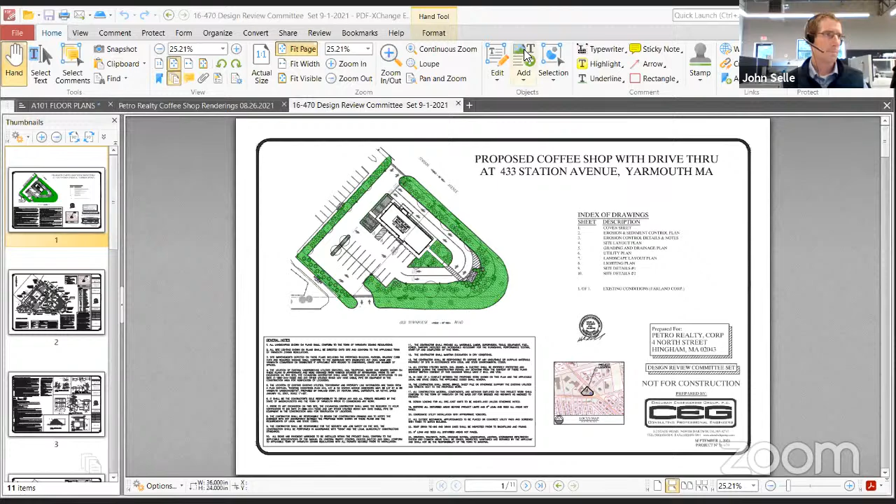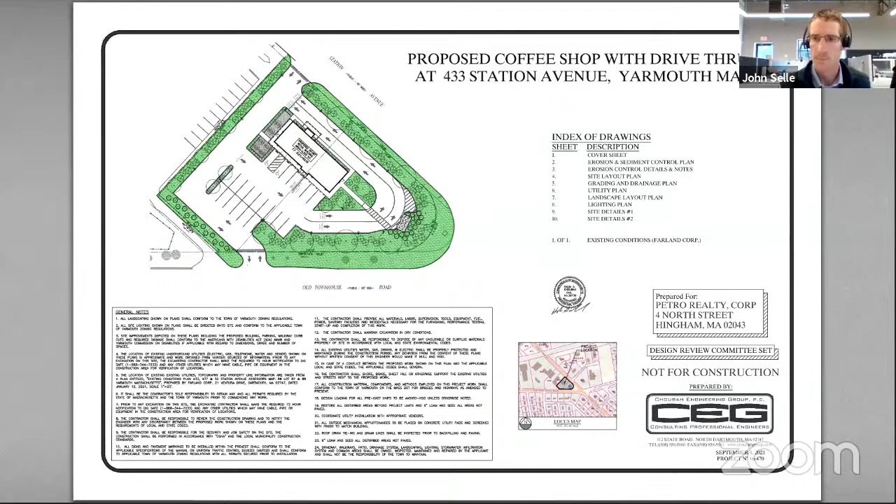John, did you want me to start with the sites quick? Yeah, why don't you give an overview of this site, Hal, and then we'll come back and dive into the building when we get a bit more detail. For the record, Halim Chouban, I'm a design consulting engineer with offices in Dartmouth, Massachusetts, here with Aaron and John. John is the architect, Aaron is the developer. Aaron owns the two lots at the corner of Old Town House Road and Station Avenue.

Currently the two lots are fully developed. There's a gas station on one of the lots, and another commercial building on the other lot. The two lots combine approximately 37,000 square feet. Access to the site is via four existing curb cuts, two on Station Avenue and two on Old Town House Road.

How can I? Yeah, I think one lot was 17. Combined there... combined 37. One lot is 17, one lot is 20, and combined at 37,000 square feet.

We propose to demolish the existing buildings on site, combine the two lots, revise the access to the site, eliminate two or three existing curb cuts, and improve the traffic circulation on site. We propose one building, approximately 2,400 square feet, to be used as a coffee shop with a drive-through.

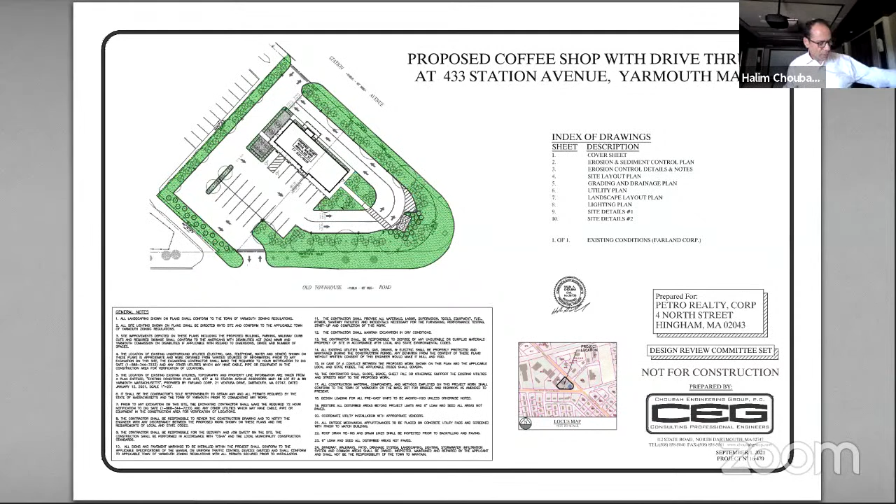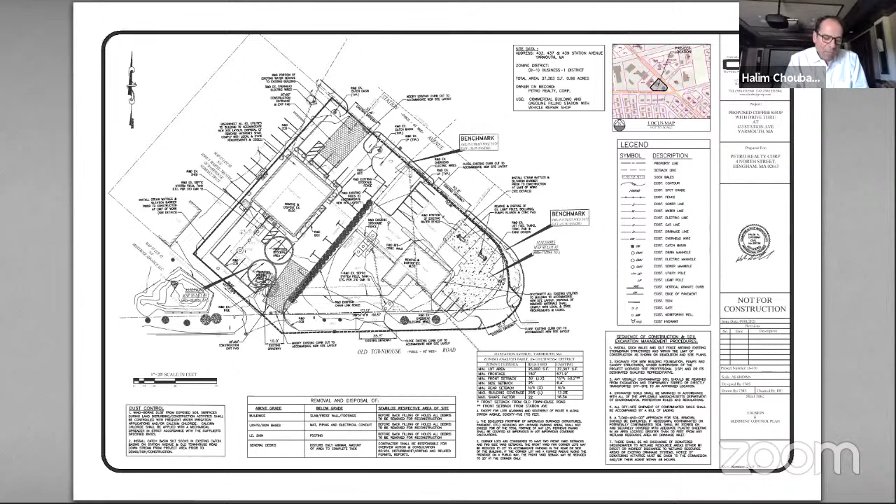We have a civil site layout, and also a preliminary grading and drainage plan. We would be collecting all the runoff from the site into an infiltration system on site, designed in compliance with Mass DEP and Town of Yarmouth stormwater management requirements. We would be providing a brand new septic system on site for the proposed coffee shop, in compliance with Title V of Mass DEP.

Landscape would be in compliance with the requirements of the zoning bylaws. I do have some other details for the site, and this is it for the site. At this time, we know we have to go through a site plan review. Once we go through your review first, we'll be going through this with the planning board.

I think we might have to check with Kathleen — we might have to file with zoning at this time. I'm not really sure what items require zoning relief, but if we do have to go through zoning, we'll be filing with zoning. Other than that, I think that's the site. If you have any questions, I'll be happy to answer them. And John, if you want to take the building portion of the presentation at this time.

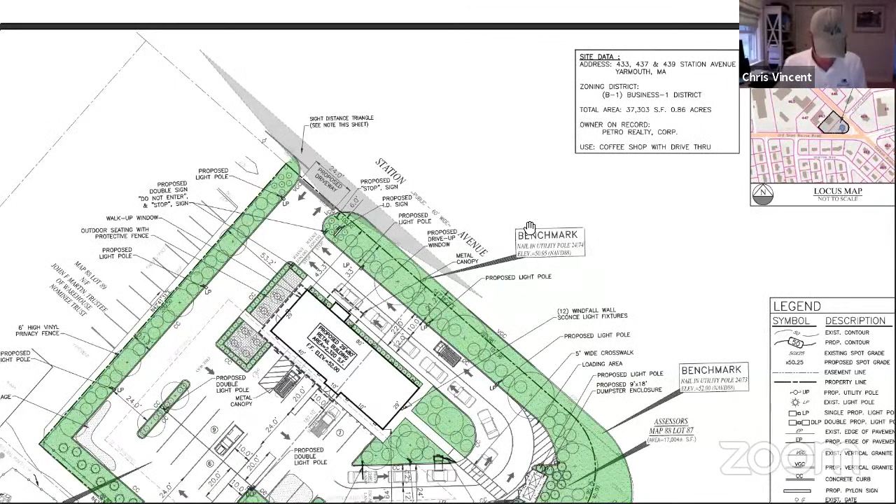The buffer that they're showing, the 21.2, includes the green space in the town right of way. So the buffer on their property is approximately 15 feet. So that is not what would be typically required, right?

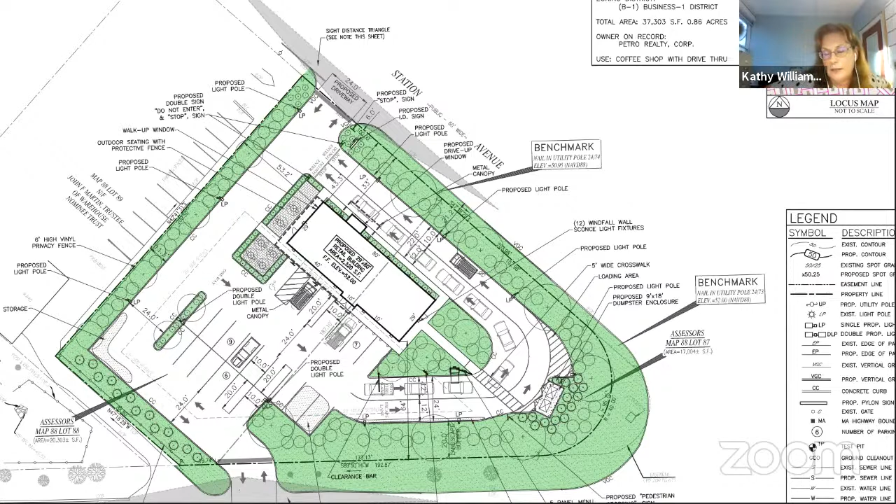This is a redevelopment project, right, so they need to meet section 301 to the maximum extent practicable. And that's something where you will need relief from zoning for that, typically done through a special permit. All that information will be identified during site plan review. This is just really looking at the architectural site and design standards.

So there's more to come. Okay, yeah, and that's fine. I think, Kathy had brought this up before, that the two so-called parking lot trees are in the area of the septic system, so that something there might need to be moved, I would gather. I also had a question about the southwest buffer, but apparently those are 3-inch caliper cedar trees along there, and I'm fine with it. So those were their only questions on the site.

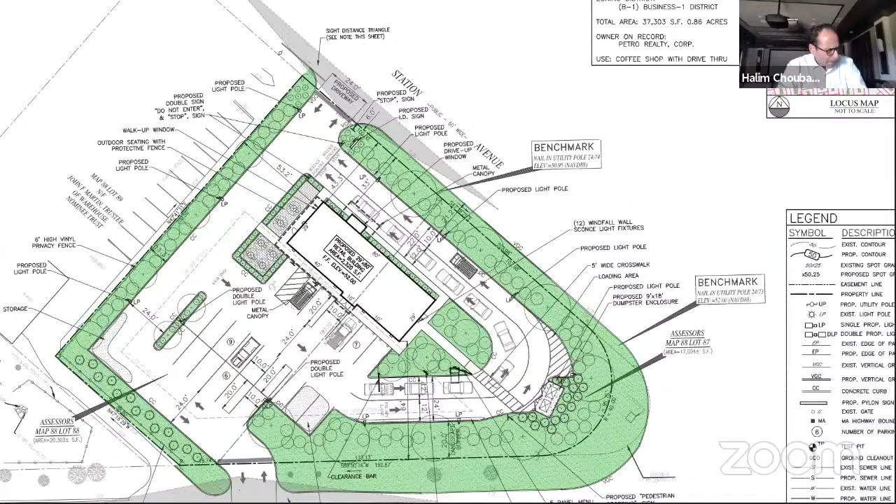Everybody will be looking forward to it, actually. Thank you. Go ahead with the building. Great. Well, actually, did anybody else have any questions on the site? I don't. Good. Okay, we'll have some overall questions that may include the site again, but go ahead with the building.

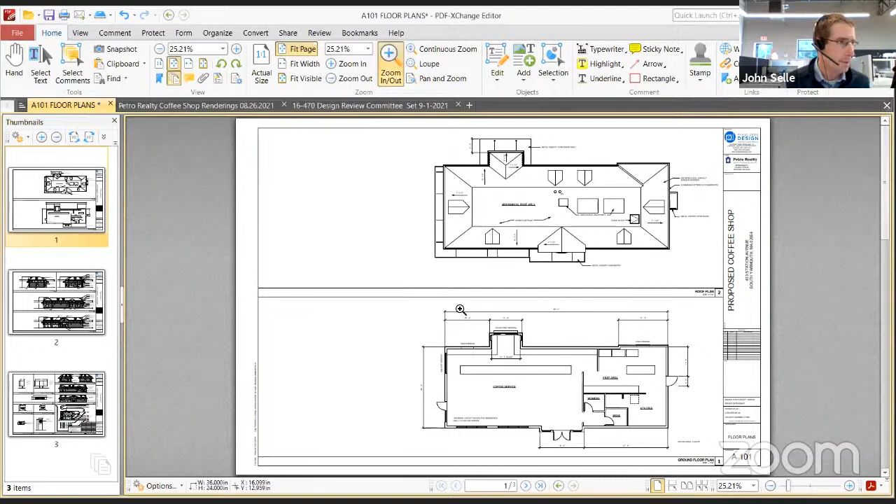Sure, no problem. So I'll bring up the floor plans to begin with here, just to give you a quick overview of the coffee shop layout. Again, as mentioned, it's around 2,400 square feet. Pretty simple layout on the floor plan.

Main entry plan south here into a sort of retail front of house with a counter providing the service for the coffee shop, and then a back of house area with a couple of single toilet rooms. Pretty straightforward, an exit out of the back of house side, drive-through window along the drive-through lane.

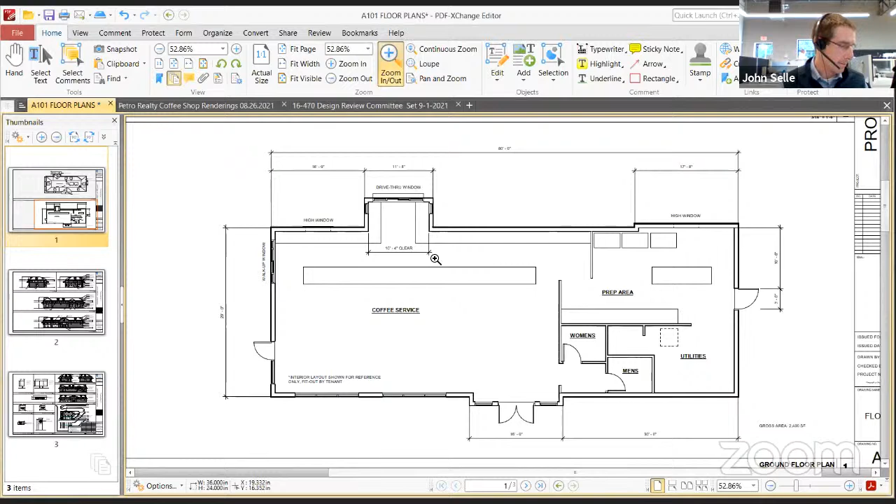The roof plan, notable feature is that we're using a hipped roof around the perimeter, but a flat roof portion within that hipped roof to allow us to have a mechanical roof well, if you will, to screen the mechanical equipment at a lower roof elevation so you wouldn't see it from outside the building.

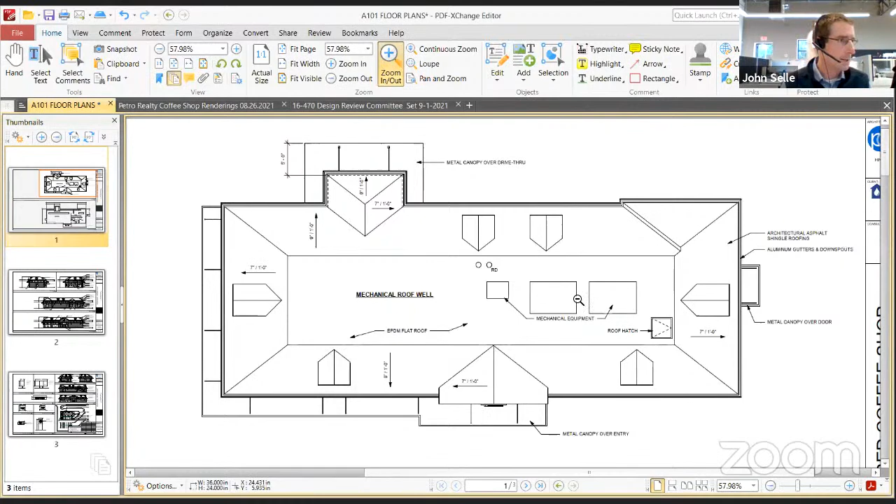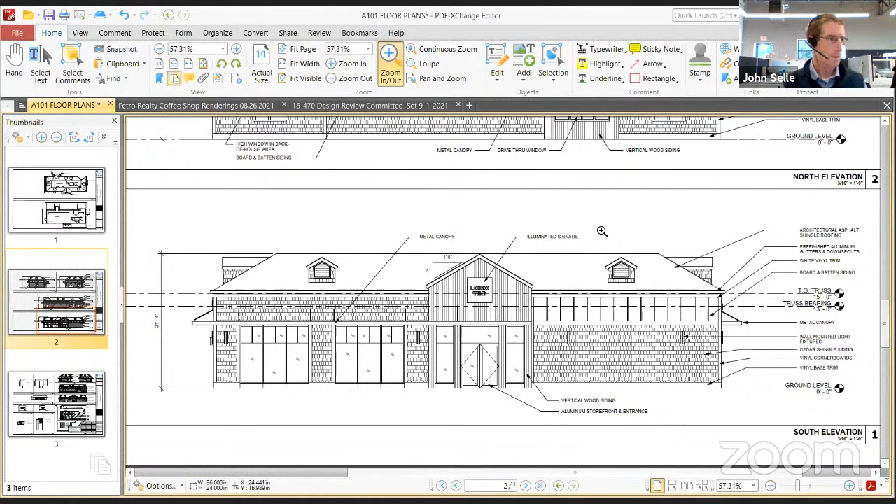A quick look at the elevations, and then we'll look at some 3D drawings that will give you a better sense of the building. It's a fairly small, fairly simple building, but we do use the materials recommended by the town design guidelines: high quality natural materials with cedar shingles as the primary material, accent materials like vertical charred wood at entry locations, white vinyl trim accents around the windows and fenestrations to break up the height of the walls in some cases, and black metal work on the canopies and other accents like the light fixtures. Just to give you a general sense of the overall materials.

Pitched roofs, we've tried to break up the mass of the building with the entry accents, changing the wall plane of the building, so that we don't have any really long runs of wall without some articulation to them.

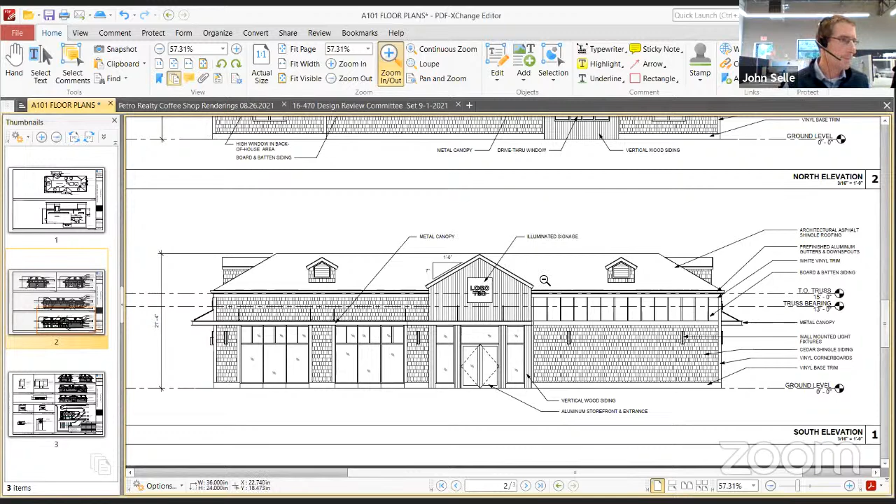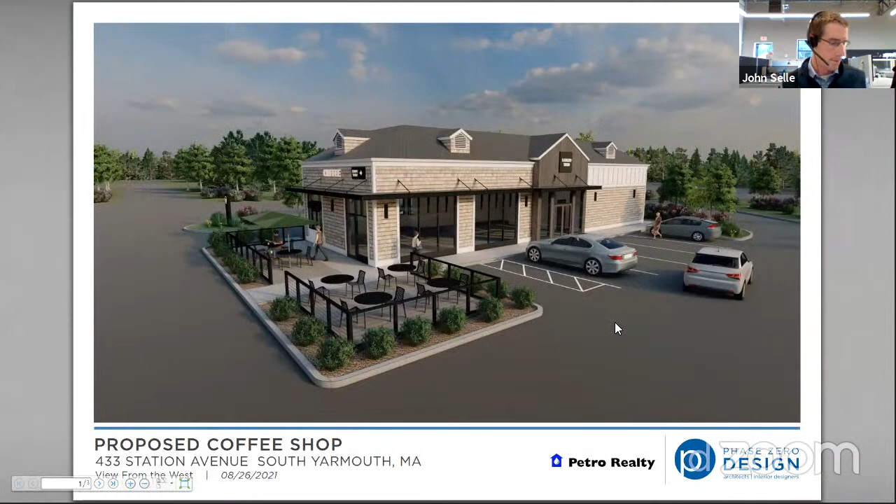I'll go ahead and jump right to the 3D renderings of the project to really give you a good look at what it'll look like. Again, primary materials are cedar shingles, vertical wood siding at the entries. The white trim is a vinyl trim. Black anodized storefronts, black accent metals on the canopies and exterior railings.

Small seating area outside of the coffee shop. Asphalt shingle roofing with some dormers on it to again break down the length of the building with some additional detail. That's another view, so this is now coming around the building into the entrance to the drive-through lane, looking back at the main entry of the building.

And then we have a view from the far side of the drive-through, looking back at the drive-through lane. Again, the vertical wood siding on the accent at the bump out at the drive-through space, the black canopies, to give you a sense of that.

I would like to talk you through signage. We will be seeking relief on signage. Kathy, is that something we need to get into detail on today's call to get a recommendation from this group, or will that be a follow-up conversation? I think design review typically talks about the aesthetics of the signage, not whether you're meeting zoning or what relief you might need. So if you wanted to show generally what you're including for signage, which seems to blend with the rest of the building.

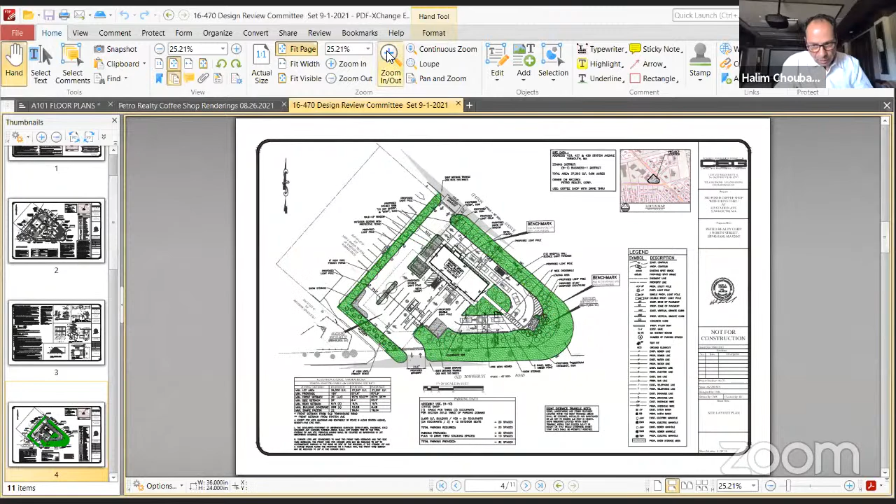It's gotta be at least 5 feet in front of the door, so we'll have to go through that. And I know that you're also proposing bollards there that aren't shown in the rendering.

Just be mindful of what you're choosing as your material. It looks like it's just PVC pipe. I'm sure the architect can come up with something a little less utilitarian that will keep the great look of the building you guys have going on there.

The only thing about the lighting is I think you have 22 feet shown for your lighting, but the maximum height allowed is 20 feet. So just keep that in mind in your photometrics.

I think you've done a great job adding the buffers around this property, which doesn't necessarily have a great amount of buffers now. But there are requirements in the zoning bylaw regarding hiding the parking with trees of 3-inch caliper every 20 feet. Just make sure you're meeting that, because when you go to the zoning board of appeals, they're going to want to show that you're asking for as little relief as you need.

I think you've done a great job getting as close as possible, especially for a redevelopment project, so I think they'll really appreciate that. But if there are a few tweaks you can make to fully meet the bylaw, I think they'll appreciate that too. I'll talk about these things in site plan review, but I just wanted to give you a heads up.

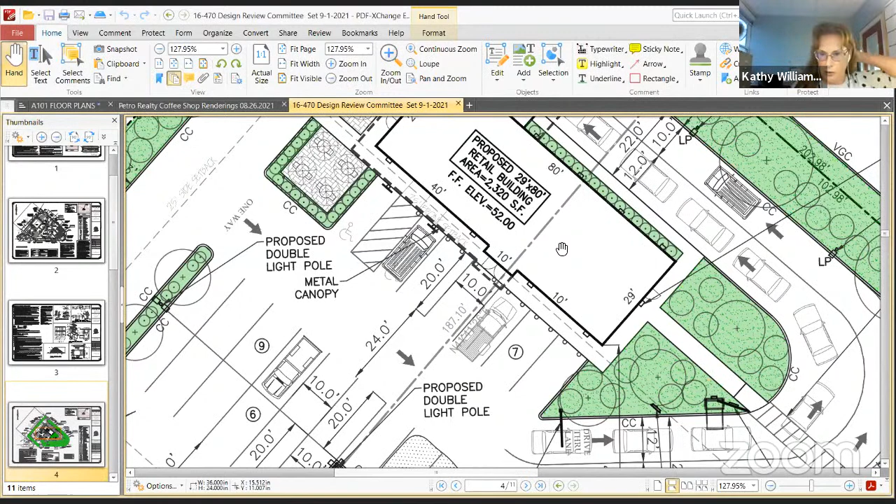I had a couple other things, maybe going back to the buffers and so forth. It's no big deal, but I noticed some discrepancies - if you count the number of shrubs shown, it doesn't always show the right number on the plan.

I'm not sure if the plan takes precedence over the code that states how many of whatever should be there. There were a few discrepancies on that. We'll check that. Also on the drive-through side, it shows, I think it was Boxwoods or whatever.

It shows them coming up to the drive-through window and beyond the drive-through window, but the pictures only show them beyond the drive-through window. So I take it the plan would probably take preference over the elevations or diagrams.

Yes, I would say so. For any of the plantings, the planting plan would certainly take precedence over the rendering.

Did you give information to Kathleen's in terms of the 2 in-lot trees in that island, which I know also has light posts? Maybe move them more toward the center of the parking area where it's not over the septic, or move the septic maybe.

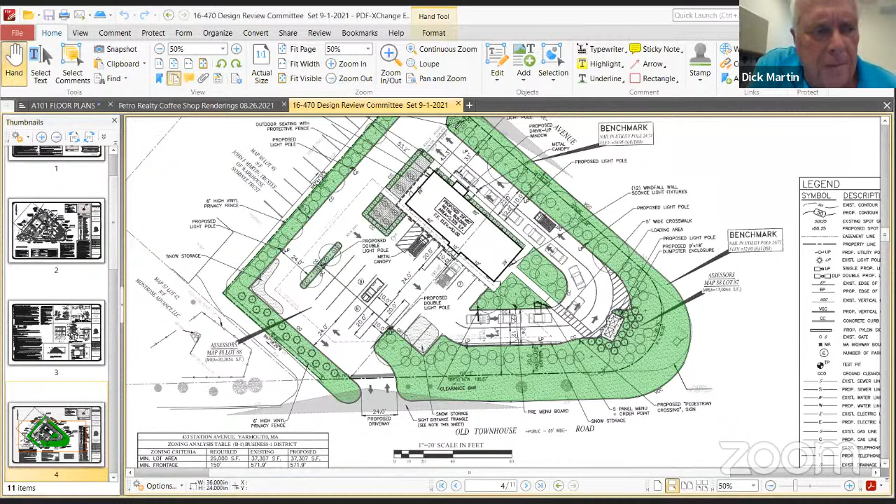You can save a trip, there's basically nothing there in front of this one, but maybe up at the CVS or something. I think there's two little trees by the old townhouse road sign which is staying, they're actually on town land anyway, planted as part of a previous relief given for the corner property - those should stay too. But along Station and Old Townhouse, otherwise I don't believe in front of the physical therapy there, I can't remember.

Across the street in front of the other donut place - I'm just curious, what do you have in mind, not Dunkin' Donuts but another type of shop like that? You don't have to answer. Probably better than that, right? You could just say who's going to be the tenant. Starbucks? We don't have a coffee shop across the street. We haven't nailed anything down yet, but it's one of the major national tenants.

Another drive-up window I won't frequent, but by the way, if you have a preference on any of the trees, we're taking requests. There's a list of trees that the conservation has that I can forward to you. Sure, that'd be great.

It's going to be irrigated, right? Gonna have sprinklers? I believe so, because it needs to - if not, it'll all die. This is one of the few summers we've had some rain. So we ran into a concern with another project - can we irrigate with town water there? Yep. Sometimes there are restrictions that come up, like every other day watering. But Yarmouth's been pretty good with that.

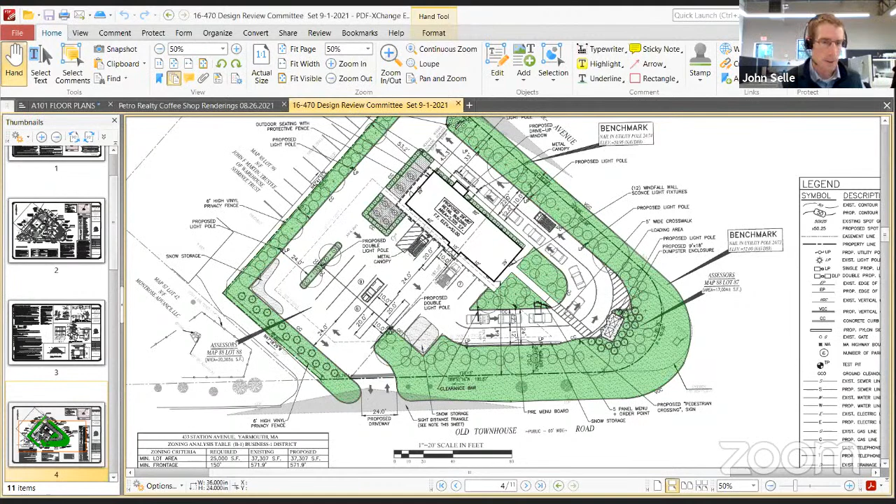Do you happen to have the existing satellite view handy? I can just Google it real quick - I saw it somewhere but not seeing it now. It's in your packet. All right, I found one. I was just trying to remember if there are any trees in front of the physical therapy, but from this aerial it looks like there aren't. No, there's one in the back, I think, on the existing line, but I realize that's a good spot.

As long as the planting plan is done with some of our suggestions, I think that'll be good. Anybody else have anything else?

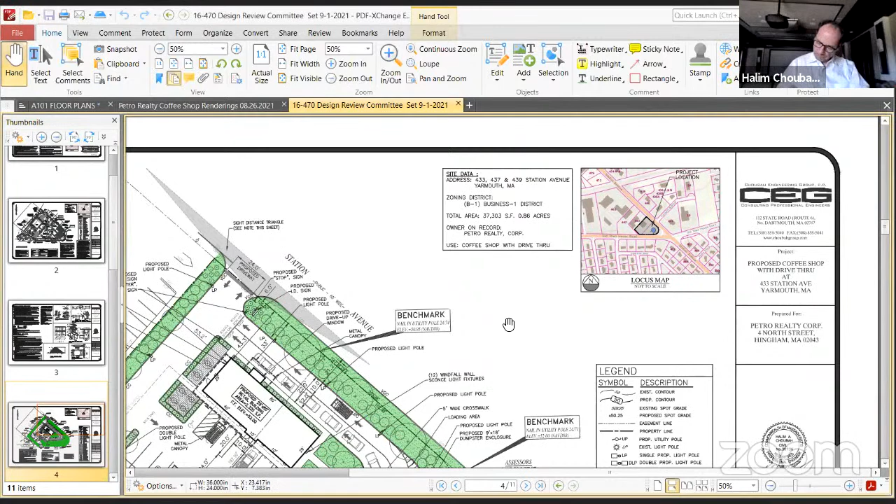Good project. Yeah, I think we're all very pleased with the project.

It gets rid of two highly non-conforming buildings and gets a pretty, very attractive building in their place with lots of buffering, and I think it's a great project. You must have seen the long lines at Dunkin' Donuts across the street.

Did you want me to put something in here about the support of the design review committee for the project? Sure.

Okay, so we need to go through the siting strategies and then the building strategies. There are going to be a few things that you might have a discrepancy on. Don't worry about it, this is an advisory situation. I think you guys have done a great job trying to be as much as possible, but sometimes just a drive-through is a drive-through and there's only so much you can do.

So the first item is street face, which is about bringing the building closer to the street and having a street-face oriented entrance. And because of the orientation of the drive-through, the building does not front along the street with a street-oriented entrance.

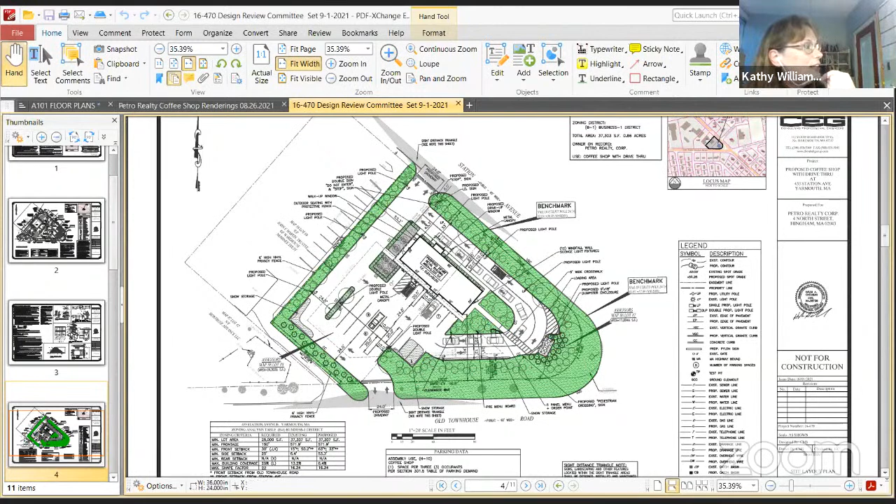Breaking up large parking lots meets the standard. In-lot trees in a planting island are shown in the parking area. I just note that the trees are shown planted over the stormwater infiltration structure, so you're going to need to address that.

Sound good? Locating utilities - when we say address it, we mean that we want to keep the trees there and shift the system. Move the system, yeah - not eliminate the trees, just to be clear. I'll include that. Yeah, the island's in the right place, so we want to keep that.

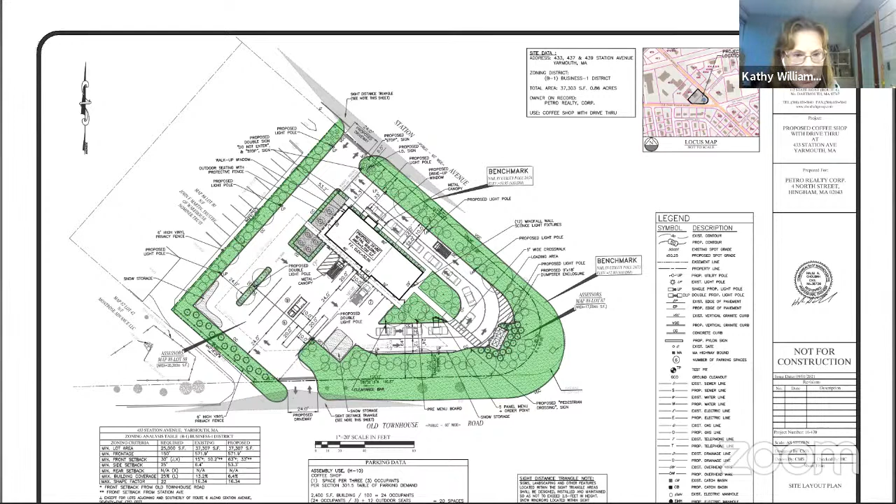Underground utilities meets the standards. All the utilities look like they're shown underground. I did just note here that the maximum height for site lighting is 20 feet.

Shielded loading areas - I think it meets the standards. They have a little area shown as a loading area just to the northeast of the dumpsters. The loading area is screened with vegetation, and I think it will probably only be used periodically - it's not like a large loading and unloading facility.

So if that's all set, we can move on to building strategies. Okay.

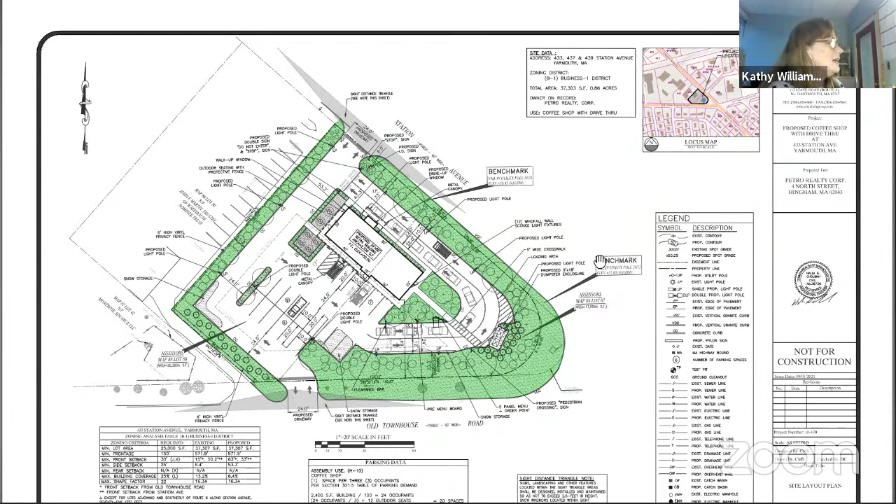Breaking down the building mass and breaking it down into submasses - I didn't think either one of those were applicable because of the size of the building, which is like 2,400 square feet. Okay, varying the facade lines.

This is a case where there's a discrepancy. Typically we like to see a 5-foot modulation every 50 feet, and on this side of the building, which is 80 feet long, there isn't a minimum 5-foot modulation to break up the facade line. However, the small bump out for the entrance with the varied wall height and materials and the large windows helps to break up the building facade. Yeah, I agree with you, Kathy.

So varying the wall heights and the roof lines, I think that all meets the standards. I'm just waiting to hear from the design review committee. Yes, yeah, I agree, yeah.

Bringing down the building edges, I think that meets the standards. The proposed building is only a single story, and the metal canopy and the changes in building materials helps to bring down the building edges.

With regard to the building materials - variation to add depth, and also the use of traditional natural building materials - I think they meet those standards. Me too. Incorporating pedestrian scale features, I think they have that incorporated. Yes. And incorporating energy efficient design, they're going to have to meet the standards on that. So that's everything.